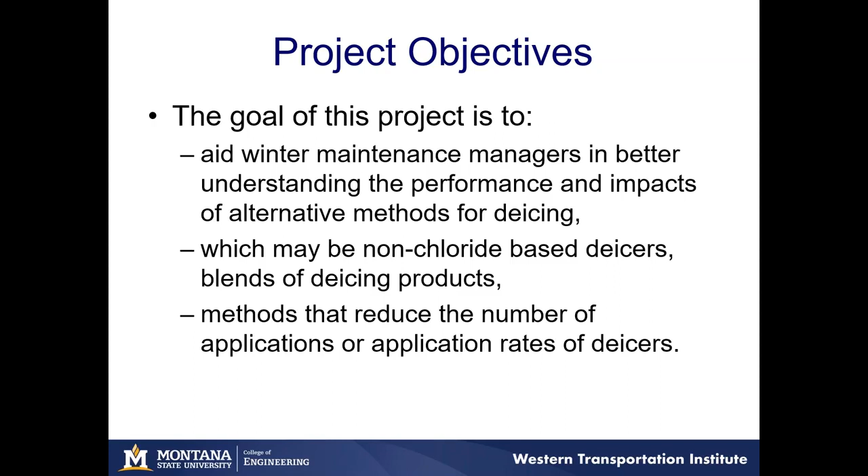So before we get too far, I want to really thank the folks that were involved with this. The Technical Advisory Committee from Clear Roads, everyone on the committee significantly added to this project. So a huge thank you to everyone. I really appreciate it, and I appreciate your timely responses. Really helped with the project. I also want to say thank you to all 90+ survey respondents and the folks that provided additional time and interviews to help support this. Thank you to Greg for your leadership and all the support staff at WTI for making this come together.

So let's really jump into this. So what did we do? Well, for this project, we started with a literature search. We really were working on building off some documents that were completed just a couple of years ago. So we were looking for newer information in the last couple of years on these alternative methods for de-icing. Once we did a pretty exhaustive international search, we then developed a survey. It was a web-based survey that went out internationally, but we were also able to send the survey out as paper copies at quite a few conferences.

So we got kind of a great preview of local roads folks as well as international and national DOT folks, which was great. From those responses, we identified individuals for follow-up interviews. Those were conducted, and then all of that information was used to develop case studies. All of that was then used to develop recommendations, and then here we are now presenting this all as the final report presentation.

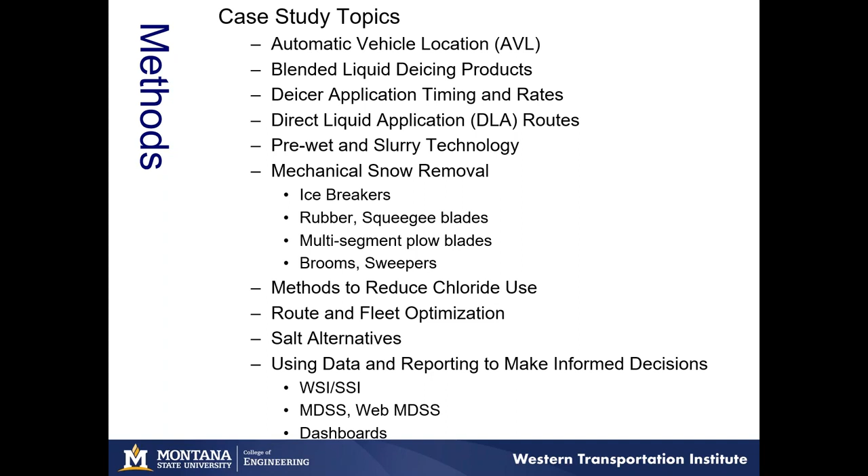So jumping into the case studies themselves, these are in alphabetical order. They're not in order of importance by any means. They're also not in order of the type of technology, material, or mechanical method. So we're going to be bouncing around a little bit. Again, all these case studies are highlighted in a single chapter in the final report, so you can easily go and reference that direct material.

Other information that can be tracked includes material use and vehicle operating properties. These aren't necessarily built into the initial AVL package. You may have to have other technology that collects this information, but that information can then be relayed through the same system.

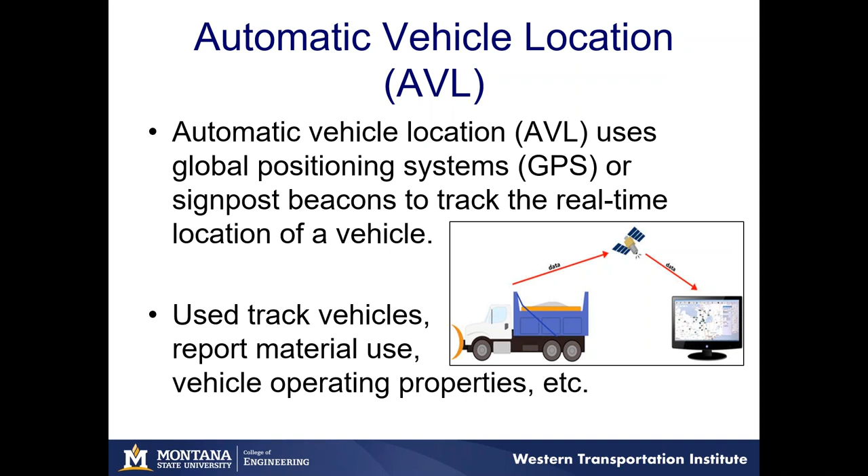As I mentioned, we highlight in the case studies different examples of how this technology is used. And in Idaho, their application of AVL GPS, they were able to realize some significant efficiencies in applications while maintaining the same level of service, which really is kind of the golden egg of, can we improve and find efficiencies while still providing safety and mobility?

The folks from Norway provided some great information. They have a unique situation compared to what we see in the United States, where they outsource all of their winter maintenance operations. And all of their contractors are required to have AVL GPS. And what they use that tool as is a performance measurement tool for the contractors. So that's kind of a unique application for us in the US, but not necessarily for folks internationally.

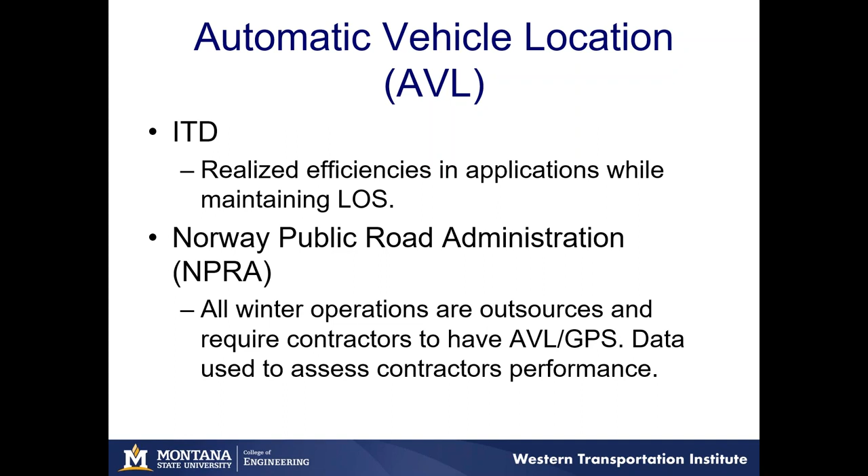Another example of this is the folks out of Ontario in Canada. Similarly, they contract out a significant, if not all, of their winter maintenance operations, and they also use the technology as a performance reporting tool. In Ontario, they also indicated that they have a plow tracking website, and they post this information on their 511 website as well.

So one question that commonly comes up is, should we provide this information to the public? And what we wanted to show is that quite a few state DOTs and international agencies are providing AVL GPS plow locations. And so if that's something you're thinking about, you can then kind of reach out to these agencies and talk about the pros and cons of whether that's appropriate for your agency.

Another example of AVL GPS implementation is in Pennsylvania. They have just over 2,000 vehicles outfitted, and they track routes, material use, and they use it for optimizing dispatch of vehicles. They also post this information to their website. They have a Where Is My Plow website, and it also posts to the 511 system. Moving forward.

So the next case study topic was blending liquid de-icing products. And oftentimes nowadays when we talk about blending products, we happen to be talking about chloride-based brines. And that happens to be because they are the most commonly used liquid products out there. But this does not mean that you cannot blend other types of products. We just focus on chlorides because that is what we found in the literature and what folks were talking about in their survey responses.

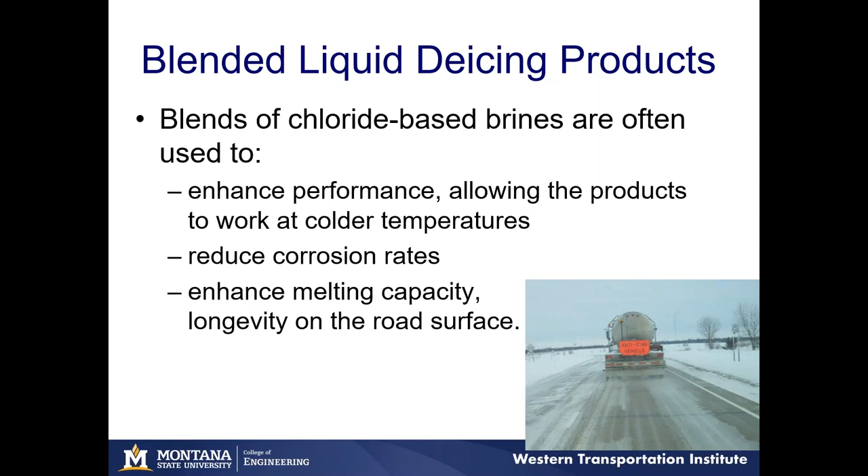Liquids are often blended because you're looking for some sort of enhancement in performance. Maybe it allows your product to work at colder temperature. Maybe it provides corrosion protection. Maybe it's enhancing melting capacity or longevity on the road, or maybe you're trying to hit all those points.

As I mentioned, chloride-based products are often blended. These can be purchased blended already from the vendor. These are often proprietary protected products, so you may have a basic understanding of what the base constituent is, so it's a sodium chloride based brine with some additives. And these can be purchased and applied directly.

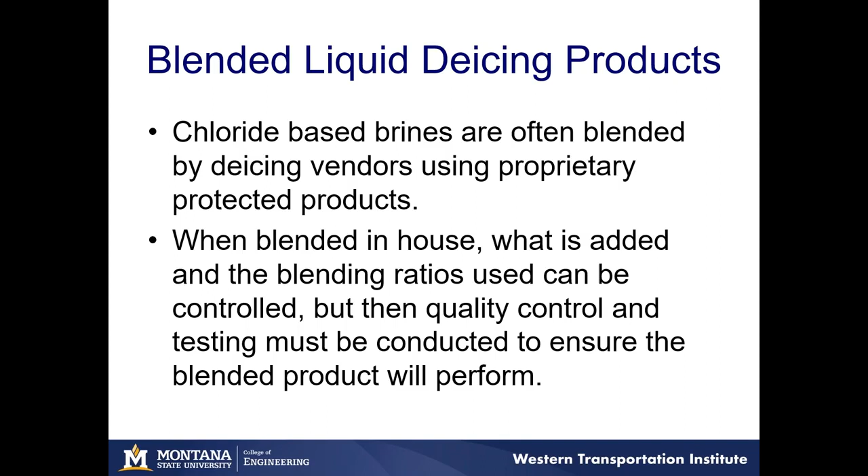You can also blend your own products in-house. This gives you more flexibility with your blending ratios and different products that are added, but that also puts on your agency the quality control of the product, and you need to make sure you're blending and you're getting the performance you want instead of all of that being on the shoulders of the vendor. Oftentimes, if you do have liquid capabilities and you can blend in-house, it is often cheaper than buying it directly from the vendor. But again, then you have to do all the testing on your own.

So products that are commonly blended, usually you're starting with a sodium chloride or a magnesium chloride based brine, and then you might add an agricultural byproduct, you might add a corrosion inhibitor, you might add a cold temperature enhancement, and these will all help you reach whatever your goal point is. Are you looking for corrosion protection? Are you looking for the product to work at colder temperatures? Are you looking for something that's going to stay on the road longer? So you really want to target your blend based on what your goal of the product is.

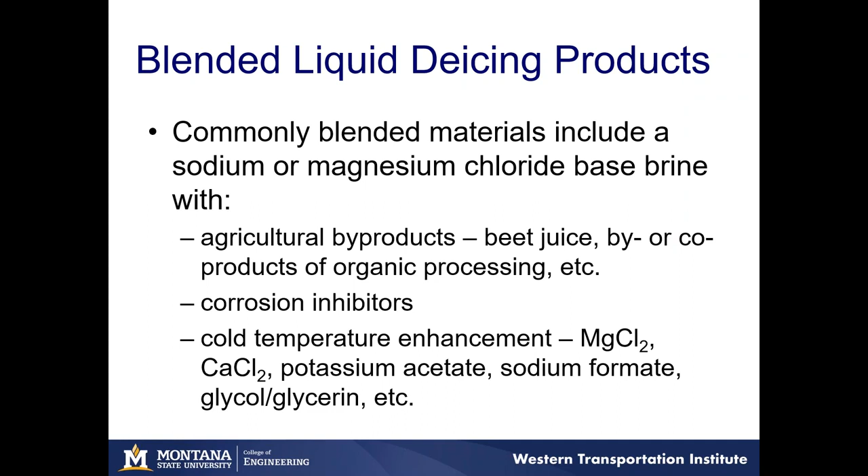So what are some examples? Minnesota DOT provided an example. They purchase a blended product. It's a salt brine that has a calcium chloride additive for colder temperatures, as well as an organic additive for corrosion protection and I guess stickiness or enhanced kind of performance on the road.

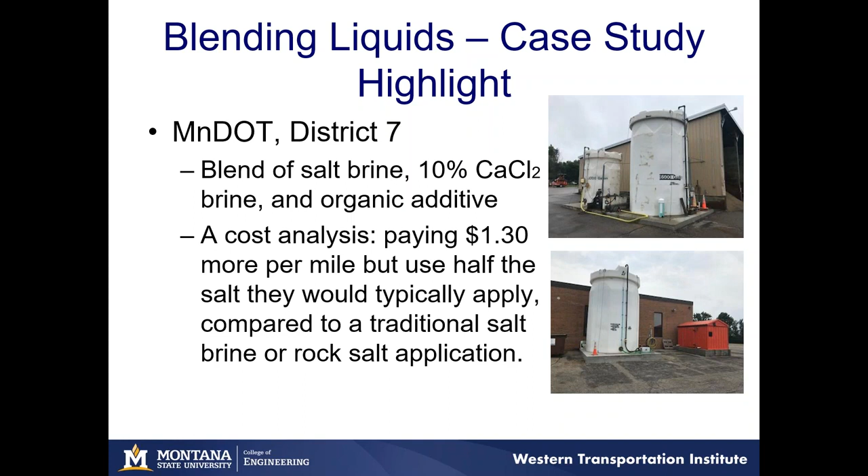What they found in using it is that they are paying $1.30 more per mile for this product, but compared to the rock salt application, they're using significantly less product overall. So they see this as a good functional product that's helping them hit their mark, and they're using less of it over time, even though they might be paying a little more for the product itself.

So moving on to the next topic, we're talking about de-icer application rates and timing. So what you'll see as we go through these case studies is some of them are technologies that you might need to purchase. Some of them are practices that you could implement on your own without any real investment, and this happens to be one of them. So what's critical to think about is your snow and ice control material application rates and timing can be tailored to meet the needs of your agency, specifically in your different climate and weather patterns. An example of this might be a shift to anti-icing or use of liquids applied ahead of a storm if you want to reduce material use overall.

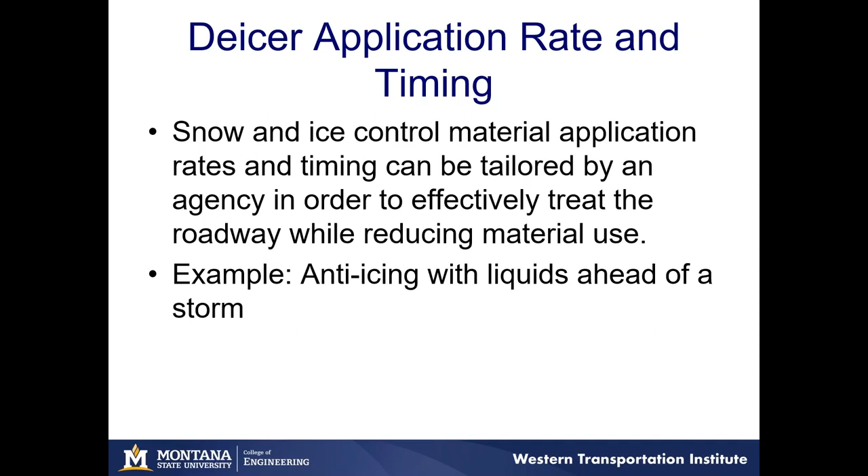An example of this is Utah DOT provided us their summary table that they provide their snowplow drivers. And they provide guidance on the storm type, the temperature, and the application rate. So in order for a plow driver to successfully implement this, they need to be able to see what the conditions are, and they also need to be able to know what the pavement temperature is fairly accurately. And from that, they also need to have control over how much material is coming out of their truck.

So you can provide great guidance, and then you can provide your drivers with tools, and you can work together to modify your application rate and your timing based on conditions that you see. And from this, you can find quite a bit of savings in application and time out. If you have a lighter, warmer storm, there's no need to put out the heavy 250 pounds per lane mile if it's not needed.

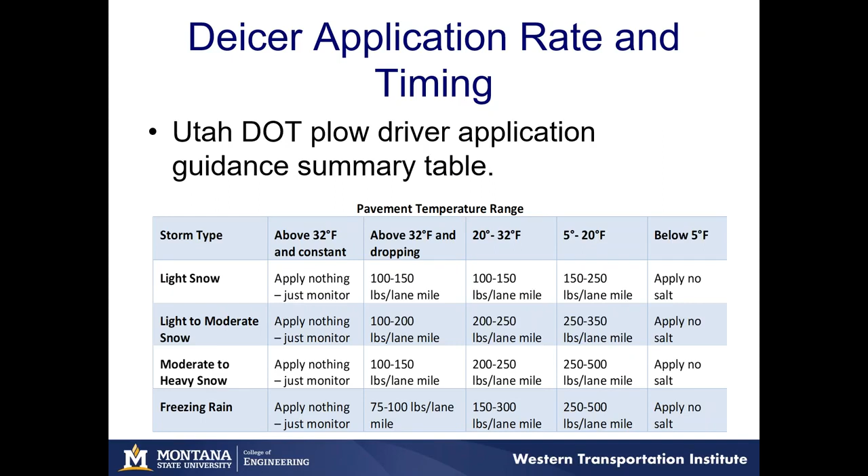All right, moving forward. The next topic is direct liquid application routes, or DLA routes. And this has been talked about quite a bit in the last couple of years. Essentially, DLA is applying liquid-only de-icers on the road surface. So in a way, it's anti-icing, but it could be before the storm, or it could be during the storm. And one really important note is that just because you are choosing to use direct liquid application does not mean that it's appropriate all the time. Just like any other tool, it has an appropriate use and appropriate time. And we'll go over that a little bit.

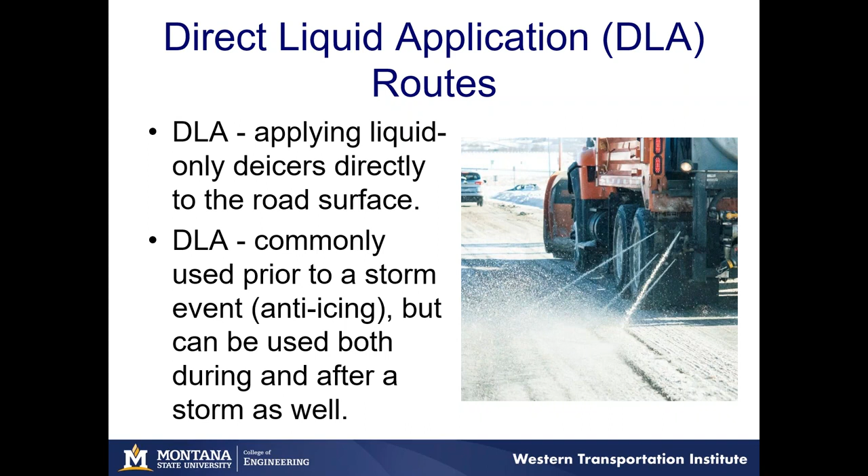So when you're talking about using DLA, you have to consider three main factors. What's your pavement temperature? What's your storm like? And what's your moisture content of your snow? And these are critical components that'll determine the success of a DLA program. So from an overview document that was put out fairly recently, which we do reference and you can go directly to from our report, it's most effective when temperatures are at or above 25 degrees Fahrenheit.

For the folks in Canada and Norway, if you're on the line, I apologize. I don't provide Celsius in all of the slides, but we do in the report.

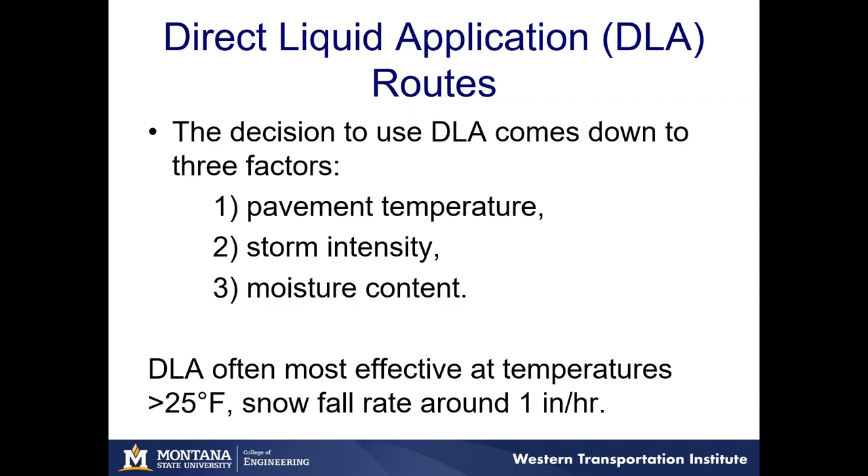So again, temperatures at or above 25 degrees Fahrenheit and a snowfall rate of around 1 inch per hour. So fairly warm and not a super high snowfall rate. But when we look at how people are actually applying this, what we find is that, for example, in Ohio, they have targeted temperatures actually a little colder, so 20 to 25 degrees or warmer, but their snowfall rate is less than half an inch per hour. So much lower snowfall rate is how they're applying this.

But from their routes where they're using DLA, they're seeing a 30% cost savings from the switch to liquids from solids, which is a significant amount of savings.

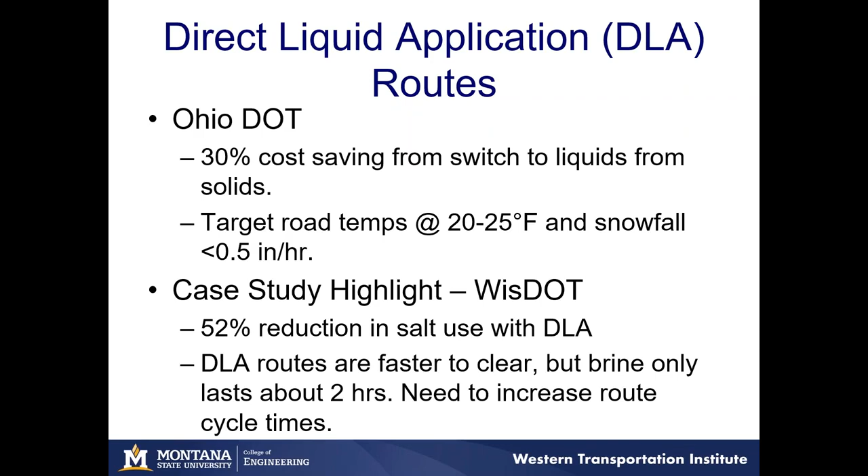We also highlight some work done in Wisconsin where they were able to see a 52% reduction in salt use on DLA routes. And what they found was that on these routes, they were able to clear them faster. But what they noted was that you're applying a brine, and the brine only lasts about 2 hours, where with the solid material, they were getting up to about 6 hours out of it. So what they needed to do with modifying their practice was to increase their route cycle time.

Moving forward, another technology that we talked about is using pre-wet or slurry technology. And pre-wetting is that tool where you apply a liquid to a solid de-icer. So maybe you have a rock salt that you're then adding a mag chloride to, or maybe you have a rock salt that you're adding a beet juice to. It's your choice. And the concept of slurry technology is you're pre-wetting, but you're pre-wetting at a much higher rate. So you're adding way more liquid to that solid material, and it's going to be more oatmeal-y in consistency.

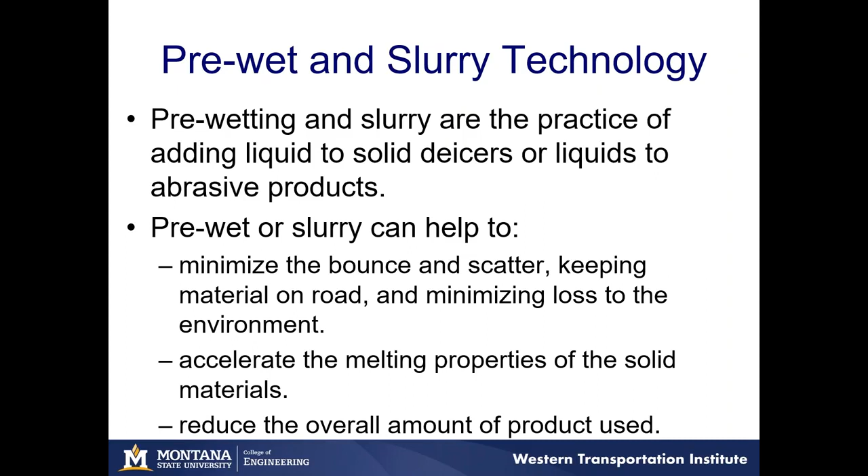I think a lot of folks are talking about pre-wetting, so we're well versed, but the benefits of pre-wetting and slurry can be huge. They can reduce bounce and scatter of material as it's applied, so that keeps the material on the road where you want it and less material in the environment. When the product goes out wet, it sticks, and that wetness is that brine that you need to help accelerate and start that work, that melting process. And overall, using pre-wetting and slurry can reduce the amount of product that's used.

So there's been quite a bit of talk, and we did get some great feedback from Quebec and Canada. They're using a rock salt pre-wet with beet juice, and they've found a 30% reduction in salt use while maintaining level of service. But for them, the temperature range was very important, and they target around 25 degrees Fahrenheit or -4 Celsius. Maine DOT, they provided some feedback that they found that the larger grain size works for the colder temperatures, but they can get away with smaller rock salt particle size at warmer temperatures.

And some work by Minnesota and some feedback from them included that they found that they really needed to drop their snowplow speeds to about 25 miles per hour to get good placement of this material and keep it on the road where they wanted it.

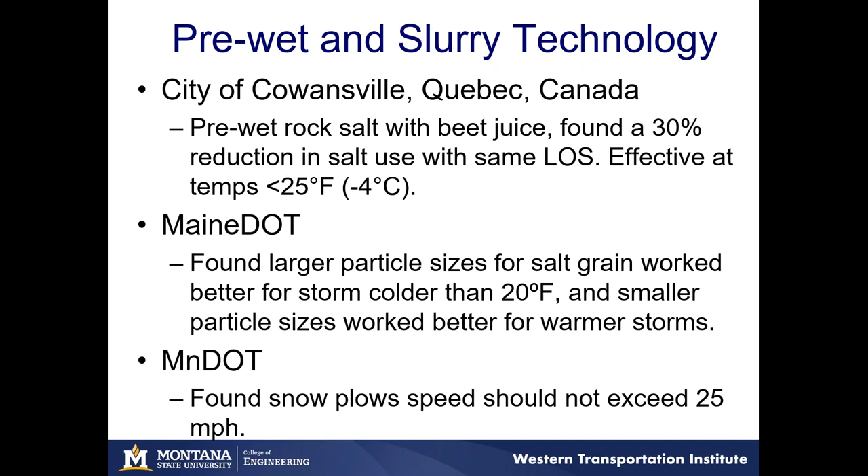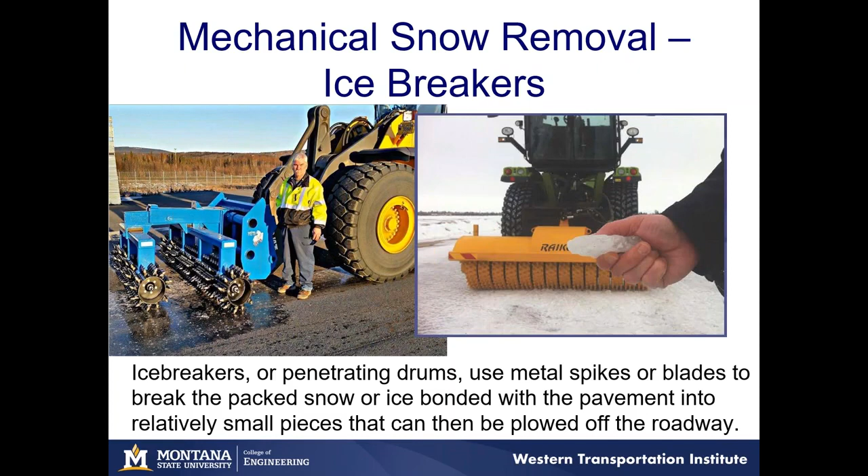So enough people have tested and used this technology that there's some really good lessons learned. One of the biggest concerns that folks mention is damage to pavement, but everyone that we spoke to said that while that's a concern, they were able to manage it by being very cognizant and aware of the down pressure that they're applying. Obviously, the thicker the ice pack, the more downward pressure you can get away with, but you just have to be careful to not apply too much and damage the pavement. And in the report, we actually provide their guidance on the PSI pressure that they use to avoid damaging the pavement.

They also note that it's really hard to turn with this equipment, so try and keep that to a minimum. So nice straight stretches, it's going to work better on. And your driving speed needs to be fairly low, 15 to 17 miles per hour. So you're just working on really going slow and breaking up that ice. And obviously, any in-place infrastructure like bridge joints or railroad crossings, you need to be very careful of, and maybe just even lift it as you go across those.

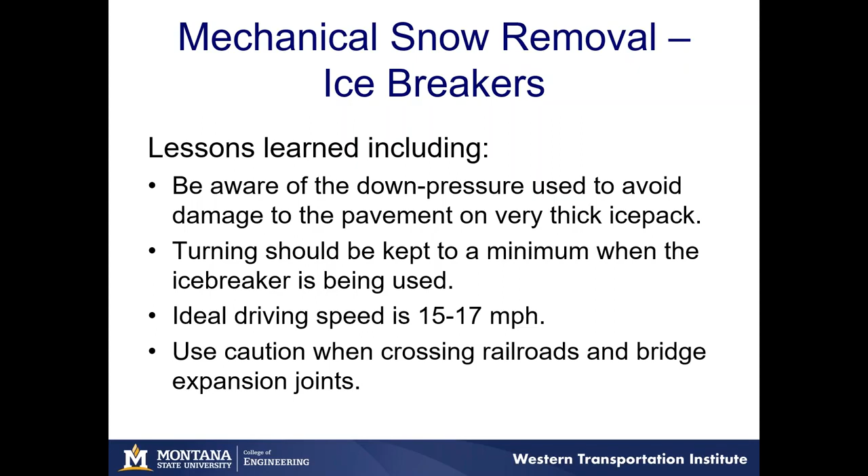So examples that we found, I'm sure there are more out there. Alaska, Minnesota, and Utah have all tested similar and different technologies for icebreakers. The cost range is from the different manufacturers. There are a couple out there. We do highlight all of them that we're aware of in the report. And the range is $30,000 to $45,000 for the equipment or the attachment to your existing tractors.

The feedback from everyone was that they work really well at breaking up packed ice. And another side piece of this was as they penetrate the packed ice and snow, they create fractures in it. And so it actually allows the de-icer to get down to the pavement and really helps with plowing the material and breaking it up over time. But they were able to realize a reduction in salt use because they're not trying to burn through that pack anymore. They're creating a nice textured surface usually, so you get a higher friction value even if it is a packed snow or ice surface still.

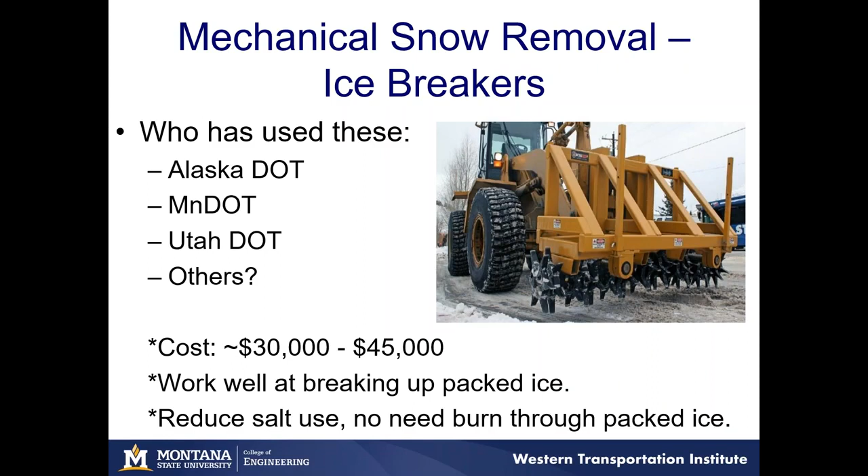Another mechanical removal technology that we talk about are rubber and squeegee blades. It's funny, when we went to conferences and we asked folks about these, they either love them or they hate them. The feedback that we found from the literature was different. Essentially, I think you hear about the positive examples in the literature. But what you can see here are two different ways to mount these. You have a single rubber blade, whereas on the right you have a plow blade with a rubber blade on the back. And there's any number of ways you could potentially mount one of these.

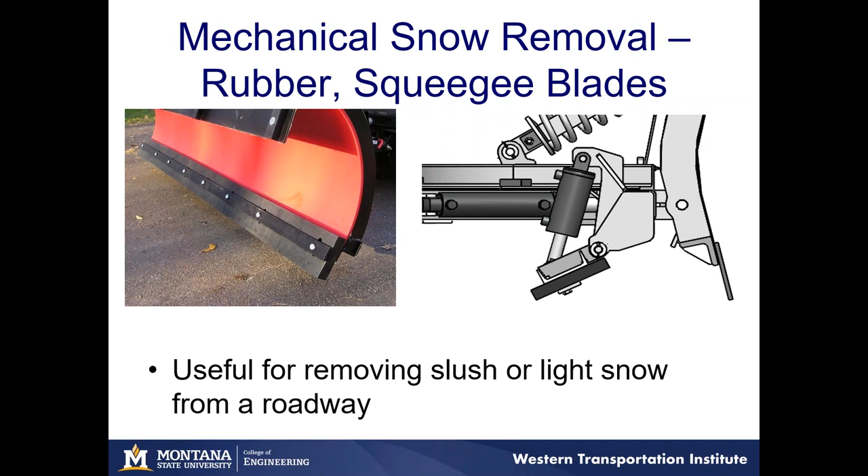But the rubber blades and squeegee blades are really designed for removing slush or light snow and essentially just kind of scraping it off very gently. There are huge advantages of these. If you have a really wet or really light snowpack, they can remove it very effectively. They do not damage roadway markings. So if you have a lot of above elevation markings, or if you have some kind of historic pavement types like cobblestones or brickwork, these work very well on that. And again, they can be used in combination with other blades. So they can be used as kind of the final clear to remove that last bit of material.

There are some cons. You have to be very aware of your downward pressure. If you apply too much pressure, you'll just wear it out very quickly. And then also, a lot of folks talked about using these on concrete, and they work great. If you do use them on an asphalt that has a high friction overlay, like a chip seal or something, they will wear quicker. So just be aware of that.

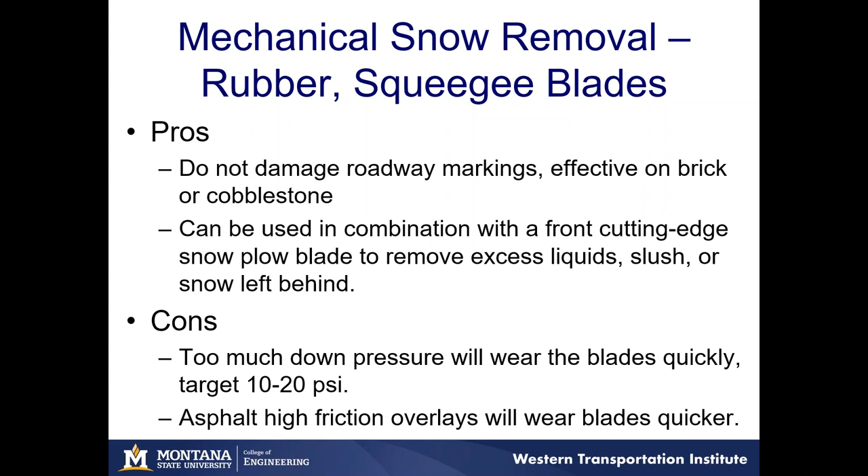Here's an example of 2 agencies that have tried these. Iowa tested a 3-blade configuration. So they have their main plow blade, followed by a scarifier, and then followed by that squeegee blade just to clean it out. And they did some testing with it with sand, and they found that with that squeegee blade on, they were able to remove 20 to 25% more of the sand in that test. So a significant amount of material was removed.

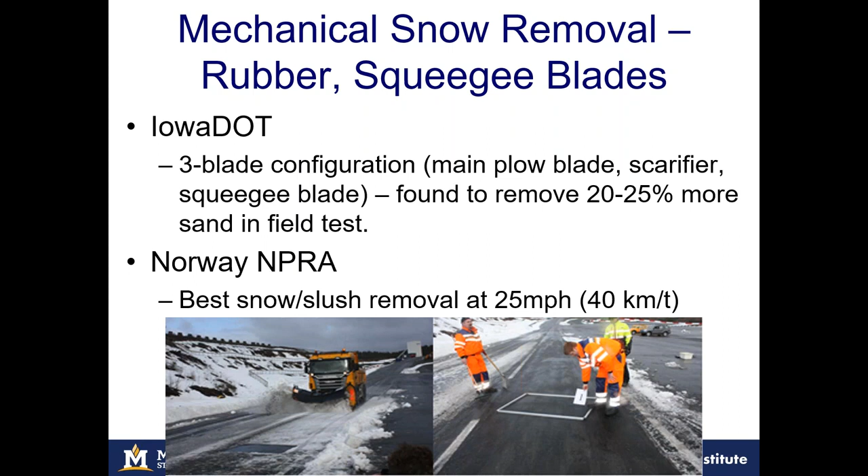In Norway, they did some field trials as well, and they were testing the squeegee blade and driving speed. And they tested it, and what they found was that the slower you drive, the more material you remove. So it's kind of a common theme with this document. At 25 miles per hour, they received about 90% slush removal from their test section. So again, if you can target 25 miles per hour with your driving, you're going to see huge benefits in multiple different facets of your program.

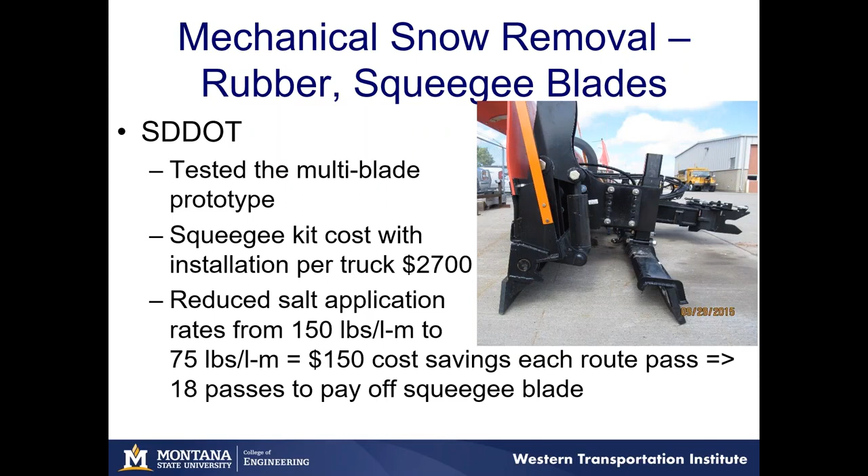Another example from Norway is they're testing multi-segmented rubber blades. And they really like these. They feel that it does a great job at removing slush, especially from deep ruts. Out here in Montana, we can get really deep ruts. The slush just kind of builds up in those.

Hi, Laura. This is Greg. You cut out there for about 10 seconds. So if you could go back and recover that again, please. Yes. Sorry about that, guys.

So the last example of the rubber squeegee blades is from Norway, where they're using a multi-segmented rubber blade. And what they've found is these blades are great for removing slush from deep ruts in the roadway.

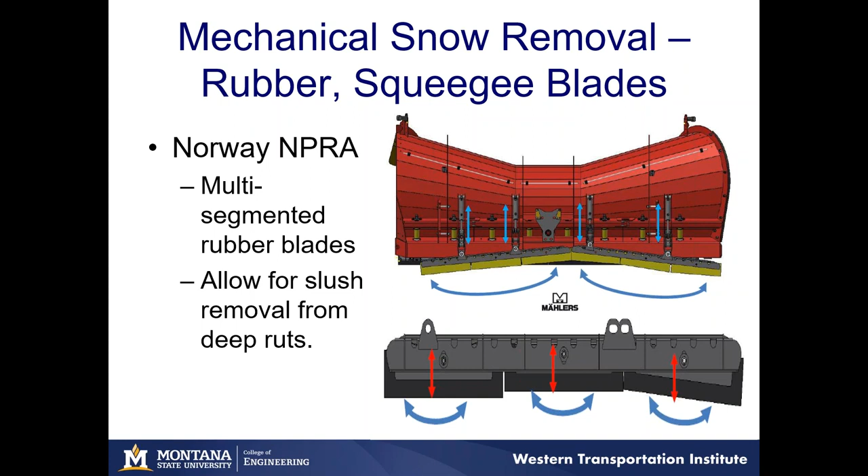And a quick, easy segue is the last mechanical snow removal method that we highlighted were these multi-segmented plow blades or articulated plow blades. The benefit is that they really can conform to changes in the road surface, whether that's ruts, as I previously mentioned, or potentially a manhole or some sort of built-in infrastructure that will get in your way. They do allow for good cleaning of the road surface while not damaging in-place obstacles.

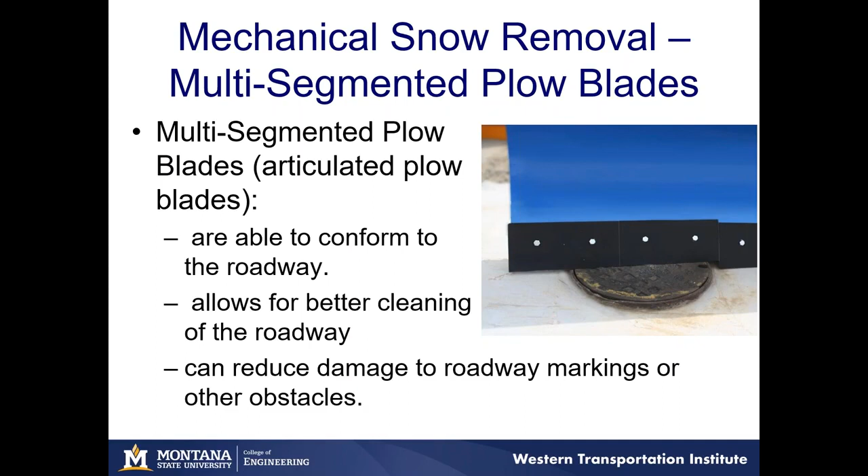Oh, I forgot, there's one more. So the last, I promise this time, snow removal technology we talked about were brooms and sweepers. And this was kind of a new exciting thing to look into for us. These are commonly used at airports and on sidewalks, and are now more commonly being considered for use on roadways.

Some lessons learned that we were able to pull from folks is that the purpose of these brooms is they are not plow blades. They are not designed to scrape material off the road. They have a very specific use, and we'll go over that shortly. But when you do use them in the right conditions, they can significantly reduce the amount of material you need and the amount of time that you put out there. And they also are good at removing slush from the roadway.

So in Wisconsin, the city of River Falls, they're able to use sweepers up to 6 inches of snow, which is a lot, but what's critical here is that it's low density snow. And the test that we use at our house with my boys is, can you make a snowball from it? If you can make a snowball and hit your brother, then that's a very dense, high water snowpack. If it's light and you cannot make a snowball from it, then it's probably a low water density snowfall. I'm sure you guys have much more fancy techniques for doing that than we do at our house.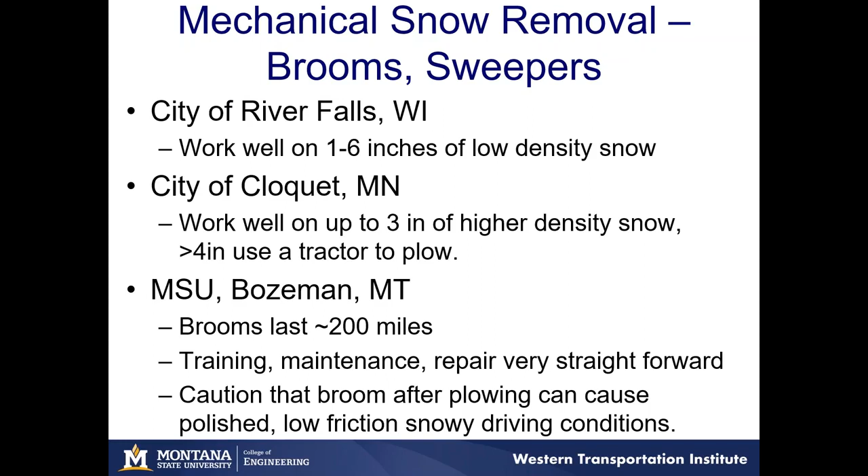The only caution that they provided for us was that if you plow and then use the broom, you can create a really nice polished, low friction, very dangerous driving or walking surface. So be very careful of that.

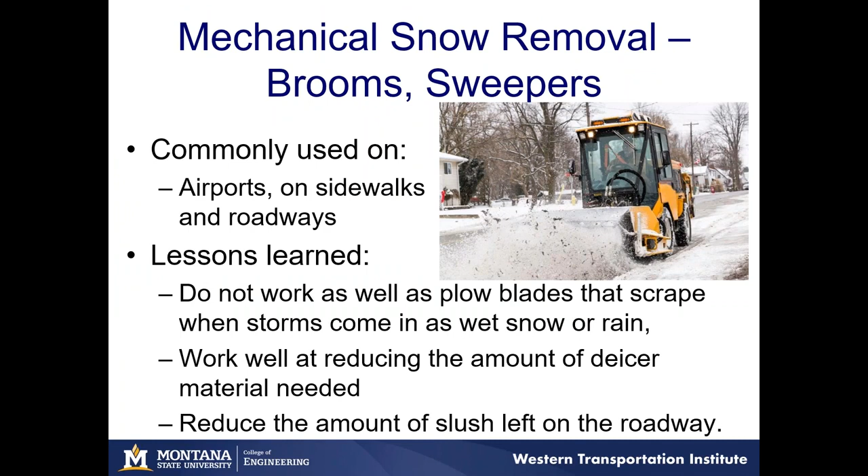And then the final example of this are the folks in Norway. They have this prototype that they were testing. It's a very expensive piece of equipment compared to the setup. I'm going to go back for a sec so you can see here maybe a smaller unit that mounts on an existing piece of equipment. So this is a tow-behind unit. You can see it's being pulled by a brine truck.

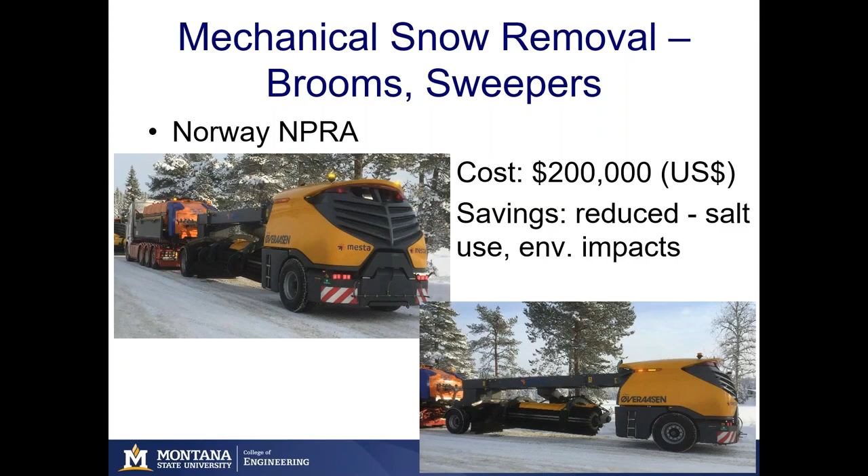But what they've found is that it reduces the need for deicers and therefore reduces the environmental impacts of their program. They actually provided a very extensive list for us of pros and cons, and they see all the same pros that you do with the smaller units.

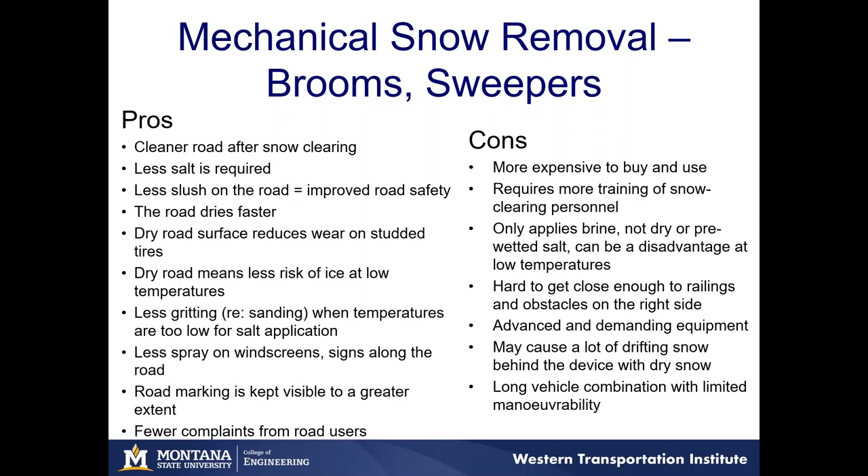The cons with this specific piece of equipment that they noted were that it's a very big piece of equipment, it's tough to maneuver, it's expensive, and this specific type of equipment requires a significant amount of training, whereas the smaller units I think are a little easier to train on and maneuver with. Another case study that we highlight are methods to reduce chloride use.

And so there are many reasons why you may want to reduce chloride use. Maybe that's just increasing awareness of environmental impacts. Maybe from the top down, you've been told that you need to reduce costs overall, and the bulk of your cost is purchase of salt. Maybe you're being regulated, or you know that regulations are coming for reducing chlorides in ground and surface water.

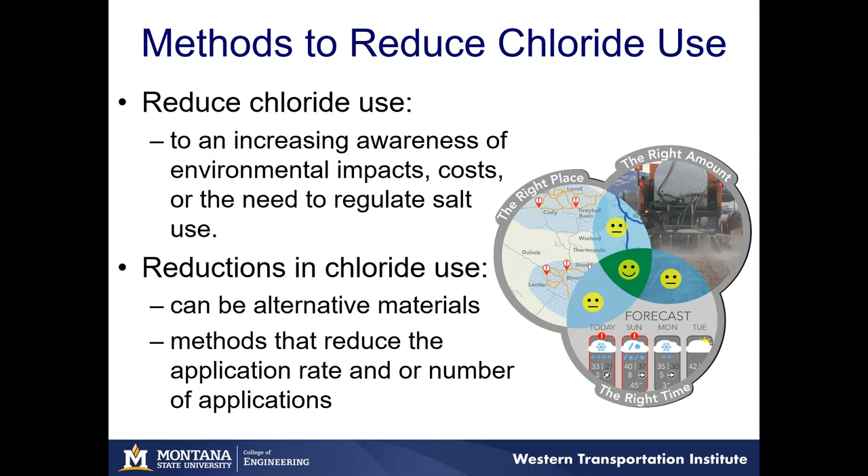There's all different reasons, and there's different ways to go about reducing. Maybe you're going to look at alternative de-icing materials, or maybe you want to look at changing some methods so that you can reduce your application rate. Just a few examples that we highlight here, there's definitely more provided in the report, but Michigan identified 44% of almost 400 lakes that are at risk of long-term salinization.

So that means that chloride levels are rising, and they're rising steadily over time to a point where once you get chloride levels to a certain point, you're going to see impacts to buried infrastructure like pipes. You're going to see impacts to humans through taste. And as you all know, it's very hard to remove chlorides. So it's better to just not put as many into the system.

What they were able to do in Michigan is implement some salt management initiatives. So they were able to look at their spreaders and what they're putting out. They were able to reduce their driving speeds, and they're starting to pre-wet and use MDSS to really support this initiative.

And in Minnesota, actually with the help of Greg, they set up a salt sustainability program. It's a great website with many tools. There's training, there's identified best practices, the concept of calibration and how to use that, using existing tools like MDSS, material selection, and handling and storage to support your program.

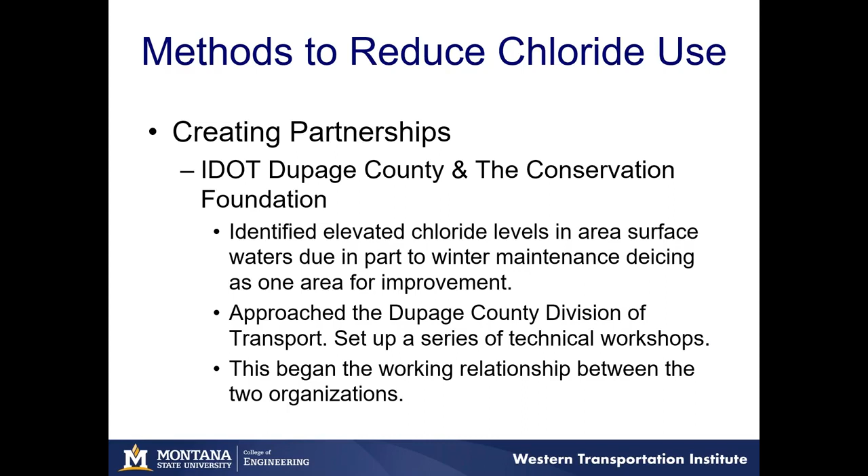Instead of being kind of enemies, they became friends, and they set up a series of technical workshops, and this created an opportunity for them to work together on the testing side, finding out what concentrations were and actually modifying practices to achieve better results.

What they needed to focus on, because they didn't have extra money to spend, were practical, low or no cost changes for the DOT. So what they looked at were anti-icing and pre-wetting. They looked at calibration. They looked at using pavement temperature data to make their decisions on what they were going to do, and reducing their plow speeds.

And what was amazing is they were actually able to see in the water treatment facility water a 40% reduction in chloride and chloride use over the seasons from these practices. So again, it doesn't have to be a huge investment to equal a huge benefit in the end. And in hindsight, I think from both ends, the conservation group as well as the DOT, they wish they had collected more data just to further reinforce all the effort and all the benefits that they were seeing.

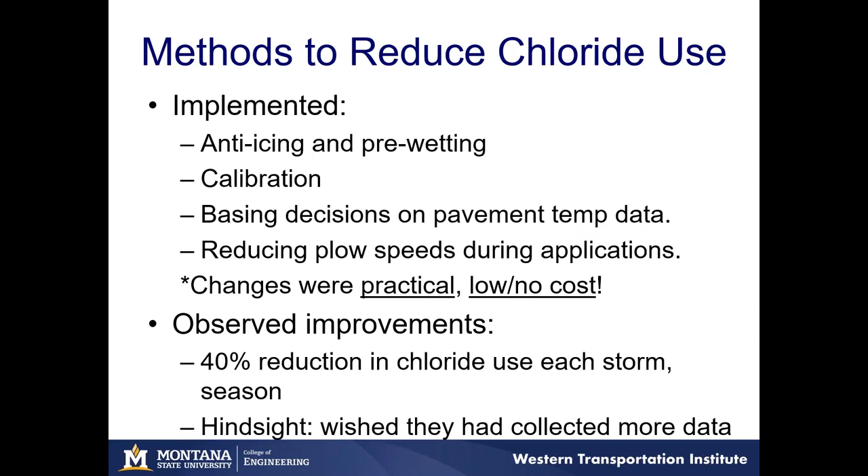The next topic is route and fleet optimization. And this is a tool that can be used. The goal of this technology is to maximize efficiency of routes for snowplows or your fleet in terms of locating them and minimizing costs while maintaining level of service.

So what is it? Well, it's generally a software package or a private company that you hire to do this for you. You can do it in-house. There's quite a bit of reported information out there on this, and across the board, people are seeing a 5 to 10% reduction in route lengths. And so that equals savings in terms of time, material, and equipment wear. So route and fleet optimization can provide significant benefits.

The biggest caution that everyone told us and that you read in the literature is you need to involve your plow drivers fairly early on and get their input. If you hire someone from the outside to run this optimization software, you might hand it off to your drivers, and they might say, this is a 2-lane highway with a barrier in the middle. I can't cross here. I can't end my route here.

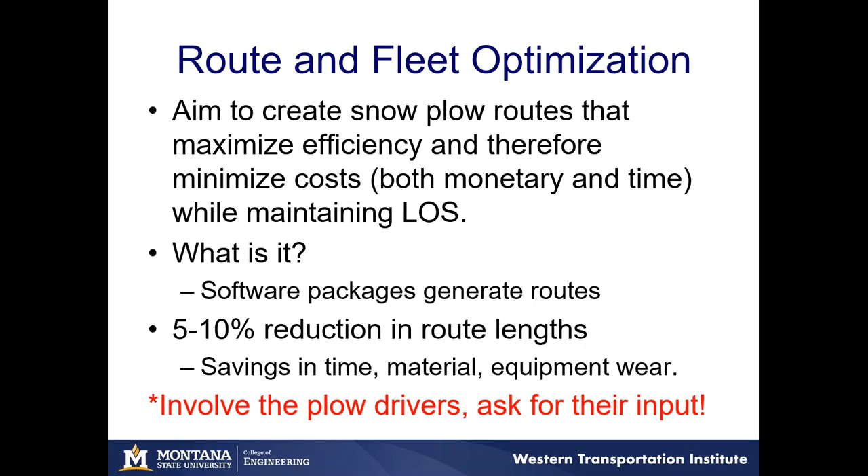Or they may say, this is not a turnaround point for me. This is a closed off, defunct parking lot that doesn't exist anymore. So getting their input is critical early on. They can really help with designing and optimizing these routes.

Some examples of agencies that have used this technology. In Kentucky, what they were able to find was that their route optimization allowed them to eliminate 9 vehicles. And that led to a cost savings of about $225,000 annually, just from not needing those vehicles anymore.

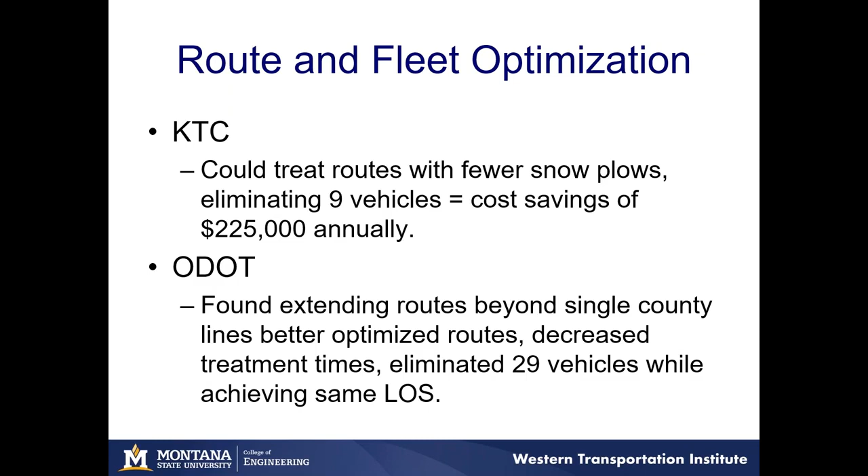In Ohio, they were able to extend their routes actually beyond county lines, and that actually optimized their routes better. It decreased treatment times, and they were able to overall eliminate 29 vehicles while achieving the same level of service. So real money, real benefits.

All right, the next case study topic that we covered was alternative deicers. So what else is out there besides salt? I mentioned blending of material already and optimizing application rates, but what are our other options? Well, sand has been used for a long time, longer than chlorides, longer than salt. But there are other products out there commonly used by airports. And then there are some other products like agricultural products like beet juices that are out there as well.

But one thing that's really important to note is that there is no one best deicer out there. Every deicer is going to cost something, and every deicer is going to have some level of impact. Even sand, not being a deicer, is going to have its costs and it's going to have its impacts. So you need to be aware of those so that you know what those are.

And I apologize. Please note that ODOT is Oregon DOT, not Ohio DOT. Sorry about that, Patty. There are too many similar acronyms.

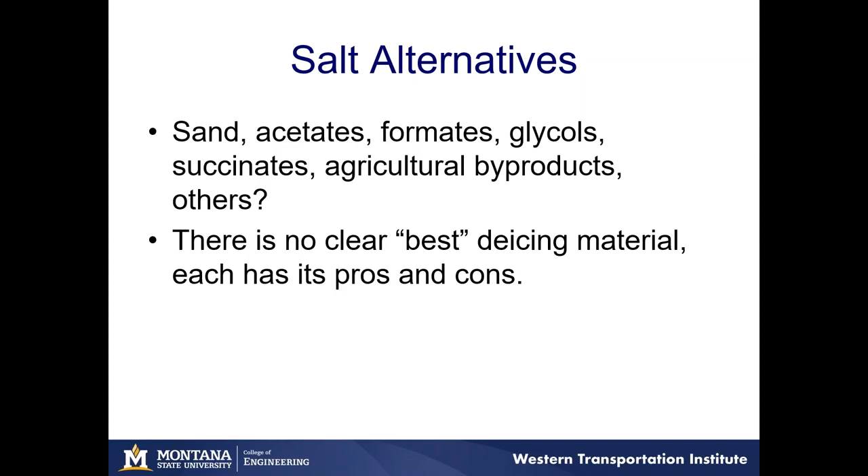So some examples that we wanted to cover were the no salt option. What is out there? So abrasives. Abrasives are a reasonable option. They do not provide any de-icing. The goal of abrasives is to improve friction. The upfront cost of abrasives is often very low, but what ends up happening, as folks know, is you end up blending a certain percentage, usually of salt, with your sand, so it's workable. So it's not truly a chloride-free product usually.

They can work at any temperature, which is wonderful, but they need to be cleaned up. And when you fold in the cost of your cleaning program, generally sand becomes as expensive, if not a little more, than chlorides. So if you're doing this for cost reasons, you need to maybe rethink how you're going to make this more cost effective.

And one way to do that is if you have approval already, or you can seek approval to reuse your cleaned up abrasives. I know not every state can do that, but if you're interested, some states can. I believe Oregon is one of them. Go to your environmental quality agency and talk with them about a recycling sand program or an abrasives program.

Usually what it involves is screening trash and other material out of it, and then also some basic testing to make sure that your heavy metal concentrations are not getting too elevated in that material. But again, sand is not perfect. You have to clean it up, and it does have its impacts, and those can be air quality impacts. Those can impact roadside plants as well as waterways with decreased water quality.

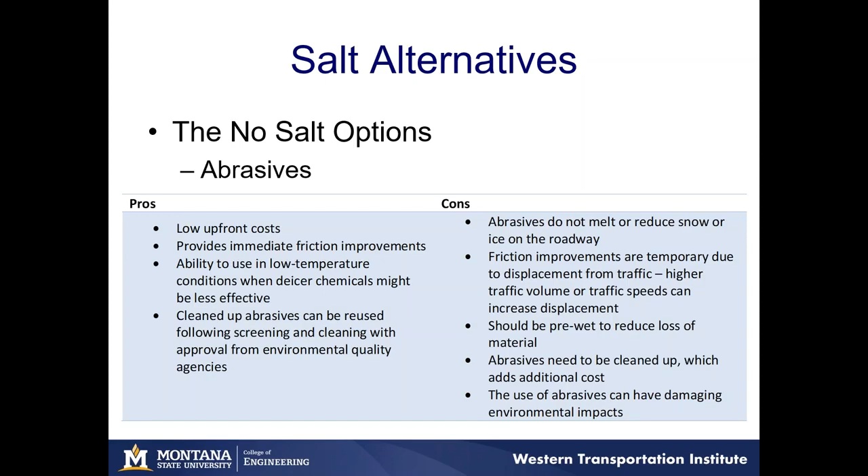What are the other options? Well, there was a whole list of acetates. Common ones are potassium acetate, which works well at cold temps. There's calcium magnesium acetate, or CMA, which works about equivalent to salt, similar temperature range. There are formates, there are succinates, there are glycols.

What we wanted to do was really highlight who was using what and how, and I have to be honest, it was really hard to find examples of people who are using it. We reached out to a couple states, and we've highlighted examples that we found and were able to verify. So I think the next step of really seeing who is using alternative deicers is to have folks step forward and talk more about what they're using and how they're using it.

In Michigan, they use CMA on some key bridge infrastructure. They've been using it since the late 80s. And the reason they chose that was corrosion protection. And what they find is that they only use about 100 tons per year. The cost is high, but that cost is justified because of the protection to that infrastructure. And they've had good success with it.

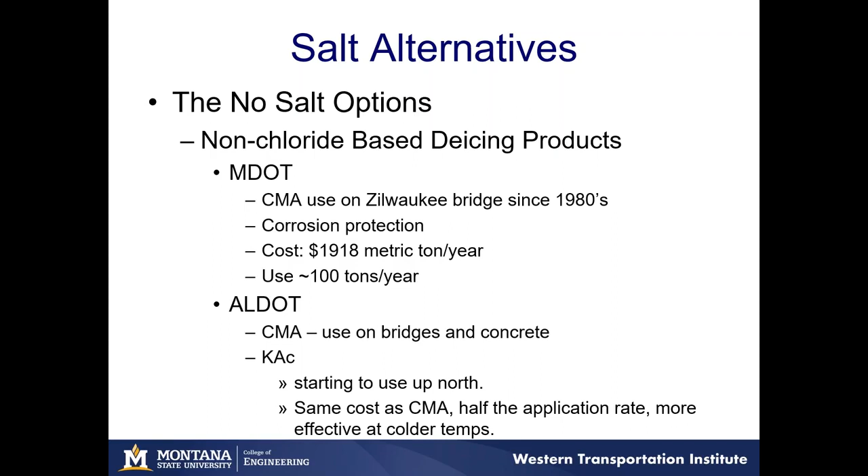We also spoke with folks in Alabama, and initially they started using CMA on bridges and concrete for corrosion protection. And in the northern part of the state, they're starting to use more potassium acetate. And what they find is that it's the same cost as CMA, but they can get away with about half the application rate, and it works at colder temps. So they're kind of having a shift within their state to other acetate-based products.

All right, so the last section of the case study chapter is on using data and reporting to make informed decisions. And this really is kind of the future of winter maintenance: we have all this new technology in the plows and on the roadsides, and it's how do we use that to better inform your program.

And that information could be captured with technology. It could be very fancy, like the AVL GPS units, or it could be as simple as someone manually at the DOT shed recording how much material they loaded in their truck, and then when they come back, how much material is left in their truck. So it really depends on what capability you have and your ability to collect that information, but then also apply that information.

Some examples of how you can do this, kind of on the high data end, is using a winter severity index or a storm severity index. There is an existing project right now with Clear Roads that provides you with a step-by-step how-to guide if you're interested in applying this technology. There are a lot of great resources on examples of developed weather severity indices.

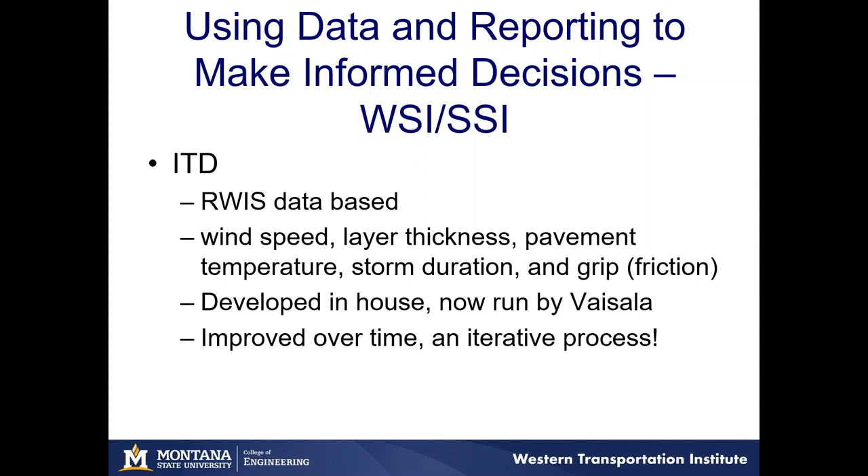Another example of using data to make informed decisions is the MDSS Pool Fund program. It's a computer-based customizable winter maintenance tool. It's a great example of agencies working together to come up with a new technology that's now a web-based tool. It provides route-specific weather forecast information, treatment recommendations, after action training, as well as now there's a new component where there is weather severity analysis built in, where you can select the type of weather severity calculation that maybe applies best to your area. So there are all sorts of different tools within this.

If you are a part of the pool fund or thinking to become a part of the pool fund, it is a tool that's out there. Interestingly, the last analysis of the functionality of MDSS was a while ago. But at that time in 2008, 2009, folks were seeing significant savings in materials. In Indiana, they saw about $9 million worth of material savings and a savings of $900,000 in overtime expenses. So that's a lot of real money. And while MDSS is expensive, if you can see that type of savings, maybe that is a good investment for your agency.

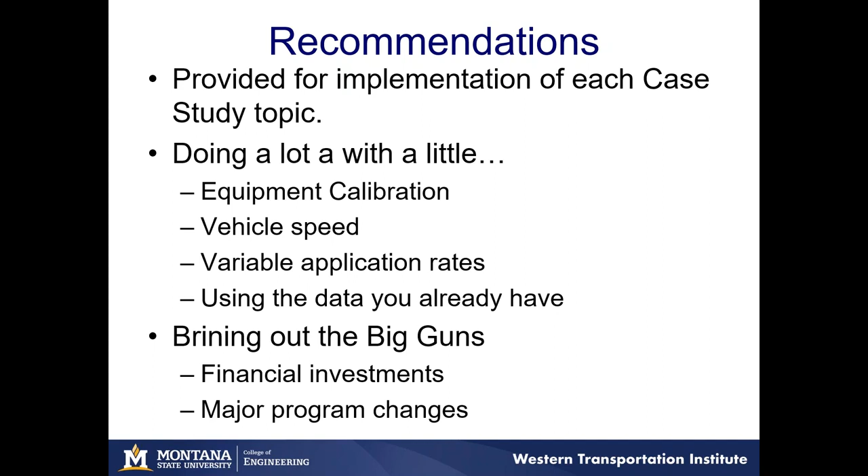But once you've kind of exhausted this list of low-hanging fruit, then you really need to bring out the big guns. You need to look at what sort of financial investments could we make to really improve our program, or what sort of major program changes from the top down and bottom up need to happen at this point in time. And so we go over examples of that as well. And one of those is looking at benefits and costs for investment.

And what I wanted to show everyone is that a cost-benefit analysis can be really complicated, but it can also be really simple. And so here's just an example. Let's say your agency wants to start pre-wetting. You have some liquid anti-icing capabilities already. So you just need to do a minor investment of, say, $5,000 per year so you can start pre-wetting your material. From your program after the first year, you see $1,000 savings in material.

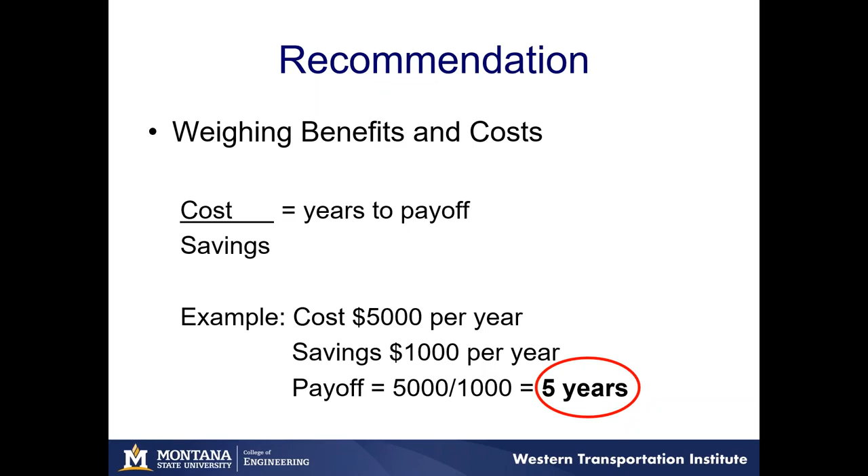Okay, that's great. So you divide your cost of equipment by your savings, and you see that in just 5 years, your investment has paid off. That's a good return time. And knowing that your equipment is hopefully going to last longer than 5 years, you can say that that has a positive benefit cost. And this can be done with any equipment or change in practice. You just need to track your costs internally and how that's going to impact you.

Another topic that we discussed with the ClearRoads technical panel was the concept of going from good to great. Everyone has a good program, and within every program, there are great parts of it. But that difference of taking everything from good to great is significant. It's like having an A in a class and wanting to go to an A+. It's a huge amount of effort, but it can really pay off.

And so what we wanted to encourage and make people aware of is this difference of going from good to great. So that requires going the extra mile, getting top-down and bottom-up support and coordination, having funding to do what you need to do, training effectively, evaluating and being held accountable of what you're doing, and all while striving to improve. So it's a huge ask, but there's a huge reward at the end. So we wanted to bring that to the table as well.

We also wanted to outline some general steps to help support your implementation of any of these ideas. So what we'd like, if you're interested in taking a new concept or technology, is start with just listening, learning, watching. Call, talk to someone, go to a conference. You see a presentation that really interests you, talk to that person afterwards. How did you do it? What worked? What didn't? What's it going to cost me? Really reach out to folks to make sure you fully understand.